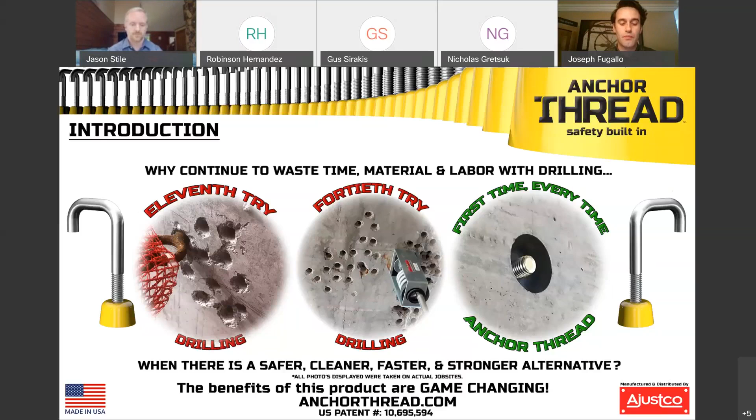Anchor thread is a revolutionary embedded anchoring system designed by construction professionals for construction professionals to practically eliminate the negative effects of post-pour anchor drilling while maximizing safety and efficiency. Anchor threads are installed before concrete placement for the purpose of being available for testing and utilization immediately upon stripping the formwork.

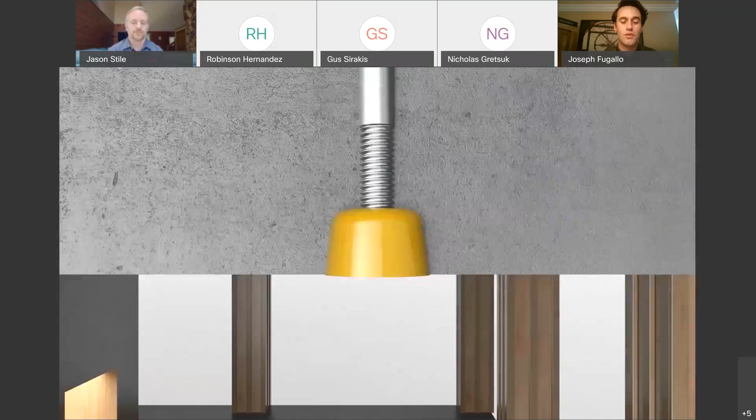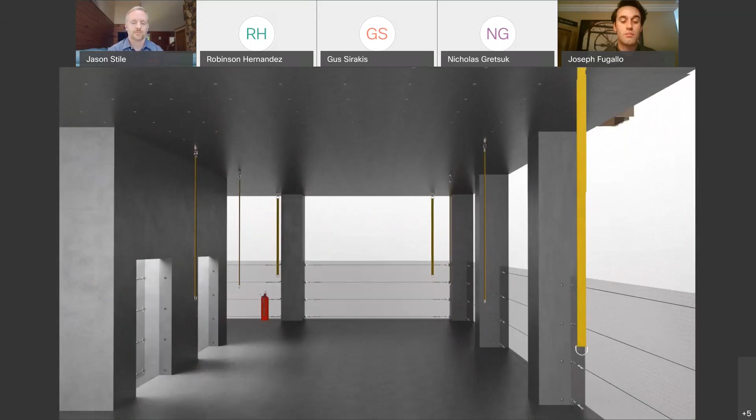First, the lock plates are nailed to the formwork where specified. Once the lock plates are nailed, the anchor bolt assembly is inserted and tightened down. After the concrete is poured and has achieved the required strength, the forms are stripped and the recyclable polycarbonate components are removed, leaving a clean, reusable, recessed anchor point rated for a 5,000-pound workload and 10,000-pound tensile strength, making it OSHA and ASTM compliant for applications such as fall protection, leading edge protection, safety netting, as well as mechanical systems such as sprinkler lines, plumbing, HVAC, cable management systems, ceiling systems, curtain wall, and many more.

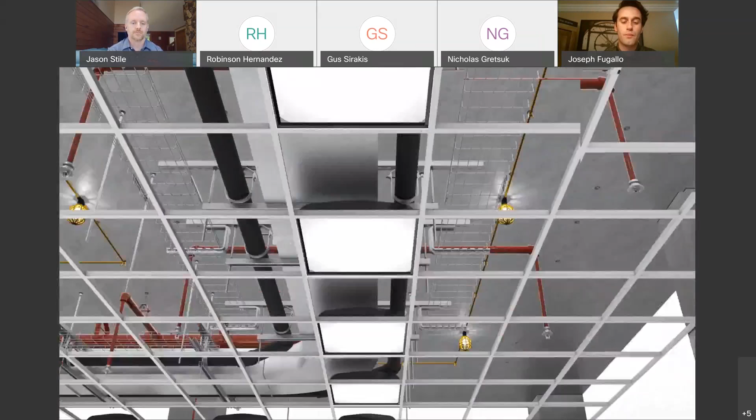We are currently developing variations of the anchor thread to work in precast plank and wet cast applications as well. With precast plank, anchor threads located on top can be used immediately for leading edge protection and reused later for a balcony railing system, for example.

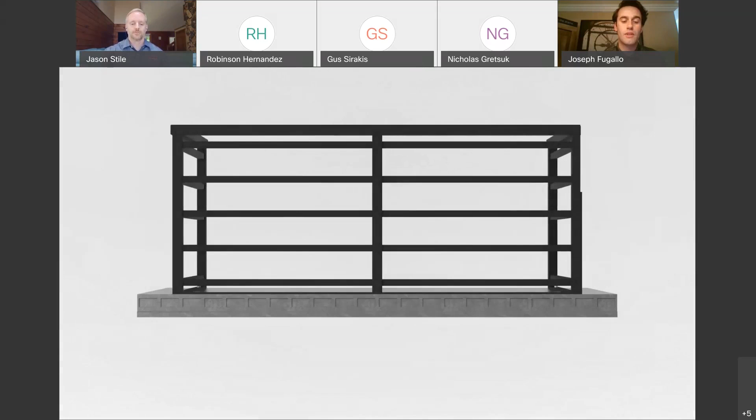The anchor thread can be quickly configured for either fall protection or mechanical systems, all while eliminating ground silica dust as well as the risk of drilling into hollow cores or pretension cables, which can be a very costly mistake to correct.

We offer a BIM object library to make specifying anchor thread as a connection detail quick and simple.

Now that I've explained how the product is installed and how it can be used, let me relate how anchor threads coincide with the aim of this innovation hack.

Implementing the anchor thread methodology practically eliminates the amount of concrete drilling operations conducted on site, which offers several tremendous efficiency and health advantages to building owners, developers, contractors, laborers, as well as environmental benefits to neighboring residents and businesses. First and foremost, anchor threads do not produce any of the hazardous ground silica dust generated by concrete drilling operations.

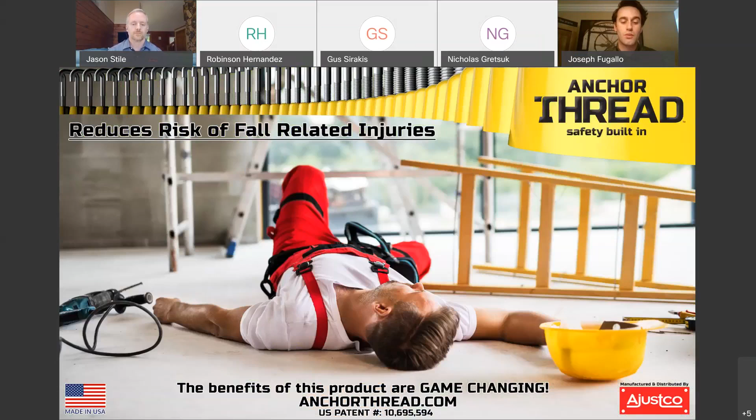Without drilling, there's also a considerable reduction in the amount of time laborers spend working overhead on ladders, which minimizes the risk of fall-related injuries. Local residents and businesses will appreciate the reduced noise level of the construction site.

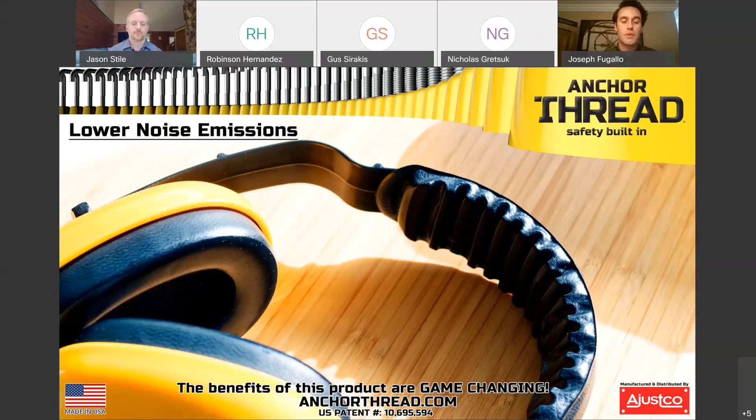With the time, labor, and materials saved with anchor threads over drilling, these resources can be better appropriated to ultimately produce projects in a safer, stronger, and more environmentally friendly manner.

In every way, the anchor thread embedded anchoring system minimizes the time and risk of installing concrete anchors while maximizing safety and efficiency. Moving into the products we have in development, we'll start off with the internal anchor thread.

The internal anchor thread is a two-stage female threaded cast-in-place anchor that features a 1/2" 13 thread as well as a 3/8 16 thread.

Next, we have the anchor post, which is a reusable temporary leading edge protection system that bolts onto the anchor thread.

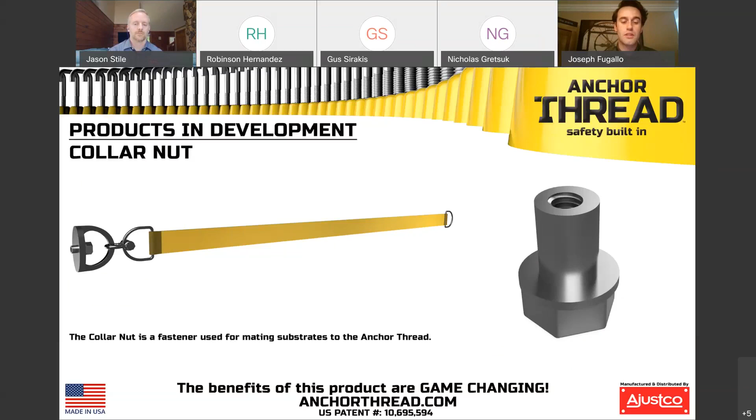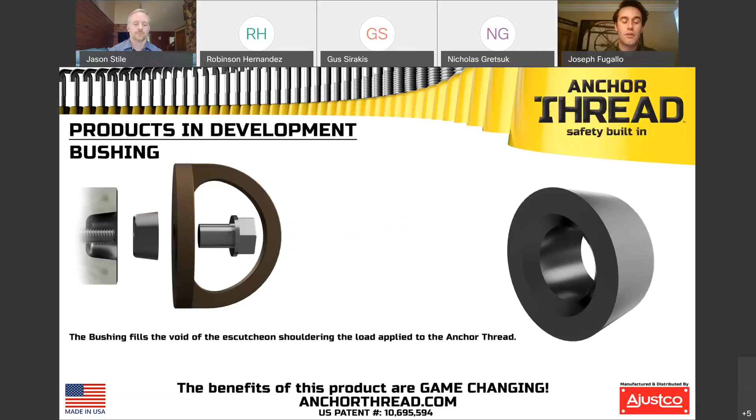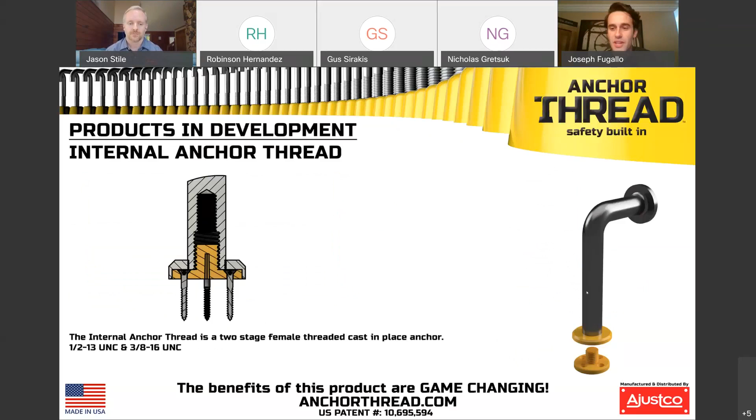So the anchor post is a temporary... I'm going to back up to that slide so you have a visual aid. The anchor post is a three-part assembly. There's a base component that fills the escutcheon cavity. The collar nut, as you saw earlier, goes into that base and threadably engages to the anchor thread that's in the concrete superstructure. Can you zoom in on that, Joey? I've been trying to figure out how to do that in the background, but I'm unable to, unfortunately. No worries. So once you have the collar nut tightened down, you then insert the post, and it clips in with these two clevis pins, and then you run your aviation cable through that.

Hey Joey, can you mention how, remember we met a gentleman that does a lot of tilt-up construction in the Midwest, and he asked us for a solution that he has a major problem with on a lot of his large job sites.

A gentleman approached us and asked if we could come up with a way to create a temporary leading edge system for his tilt-up wall company that would eliminate their current clamp-on leading edge system, which prevented them from installing the ceiling system simultaneously, or immediately following the wall being tilted up. This is what I came up with to solve that problem for him.

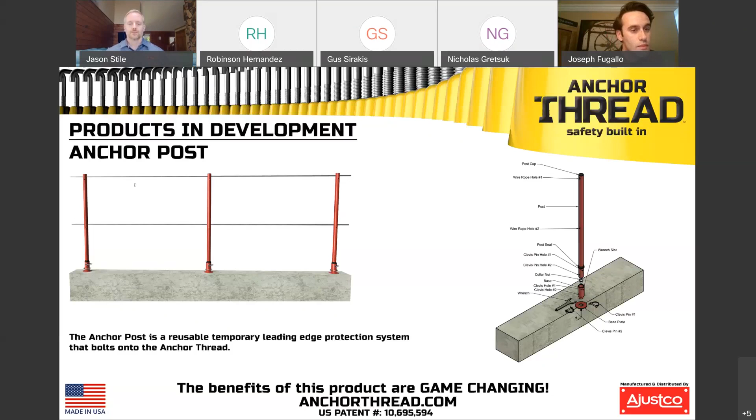We have a couple more questions coming in. What kind of testing have these systems gone through, and who is qualified to install them at this stage?

We're continuing testing because there are so many tests. The ICC-ES test takes a little while, maybe another 6 months to complete. But we've done extensive testing on site. We pulled the units in columns and in the ceiling. The max load we pulled was 13,800 pounds, and that was the limitation of the actual testing device. We couldn't test it to failure, and we didn't want to destroy the concrete on site. So we're continuing to do testing to failure, but the minimum load for fall protection is 5,000 pounds, as Joey mentioned, and the leading edge protection is 200. So this product far exceeds what's currently being used.

Right now, companies are drilling holes and then throwing in a wedge anchor that squeezes and wedges into the concrete. Often they'll use epoxy, which has to take 24 hours to dry, and technically they're supposed to be cleaning the dust out of the holes so the grip is tight. This eliminates all of those issues, because it becomes part of the superstructure.

We do have engineer drawings signed off by Becker Engineering, and we had some initial meetings with WSP. I want to give a shout out to both companies, they're fantastic engineering firms, and we'll continue to work with them. We actually have our test results posted on our website on the Anchor Thread page, and we'll continue to release those results moving forward.

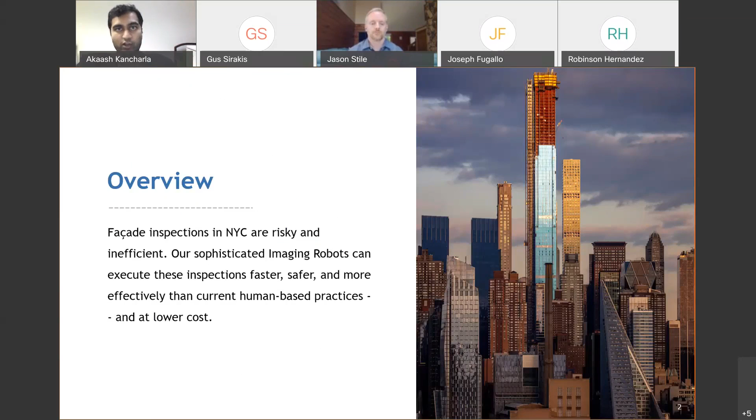Facade inspections in New York City are risky as well as inefficient. Our imaging robots are going to do these inspections faster, safer, and more effectively, at a lower cost. Presently, an engineer is on a suspended gondola, somewhat similar to what is shown here, usually accompanied by at least 2 riggers. The process is expensive, time consuming, requires multiple people, and puts them directly in harm's way.

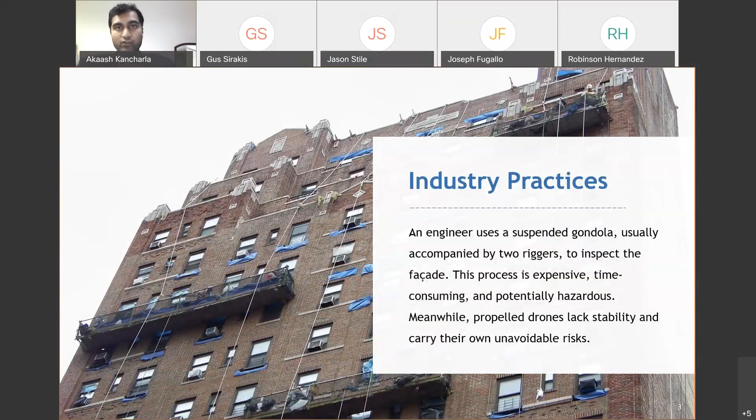On the other hand, drone-based solutions introduce their own risks, being a novel platform, and they don't offer as much stability as gondolas. Our solution combines novel robotics with time-tested mechanical elements, giving innovation at minimal risk.

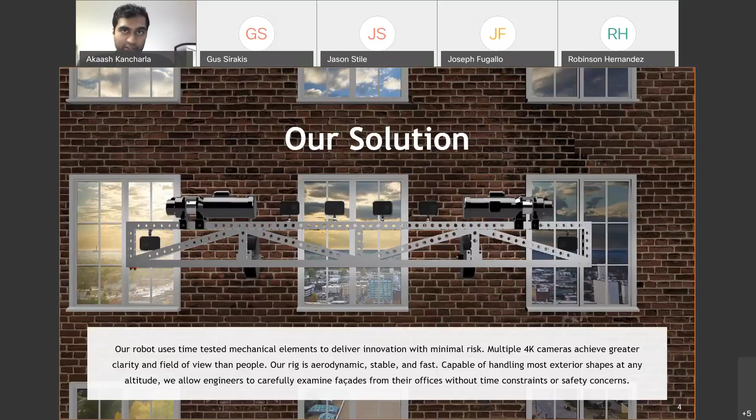We use multiple 4K cameras to achieve excellent clarity and much better field of view than a person could ever hope for. Our rig is aerodynamic, stable, and fast. We can handle most exterior shapes at any altitude. Engineers are going to be able to examine facades from the comfort of their office without any time pressure. Excellent for engineers who are afraid of heights. I know that there are at least some of them.

To go into a bit more detail regarding some selected components, the rig is basically split into 4 key parts. Cameras are very robust, they're 4K at least, and we have options for greater resolution if needed. We also have infrared options. Our hoists are extremely powerful. Each one can safely lower the rig on its own, offering a nice level of redundancy.

The pneumatic buffers and dampeners help absorb any unexpected impulse from either wind or any other external shocks. And the frame itself is extremely strong, offering well in excess of 15 times safety margin in accordance with building code regulations.

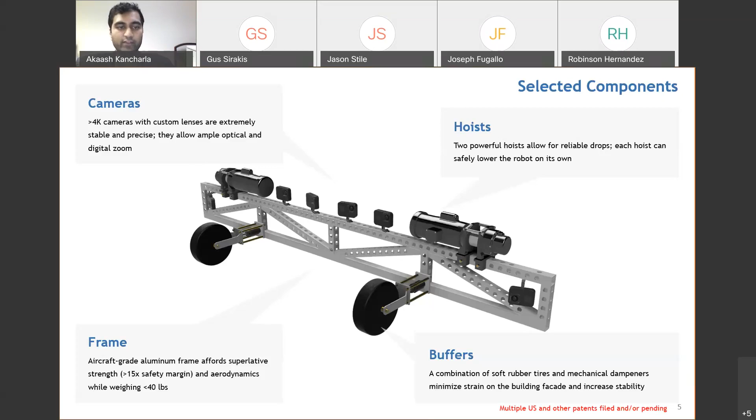Going into some of these in more detail, as mentioned, the cameras are at least 4K resolution. Depending on use cases, we can alter the field of view, we can alter the resolution, we can offer infrared and ultraviolet capabilities. Whatever the engineer feels is necessary for a given building, we can very easily pop those out, swap in another module. It takes about 5 minutes.

Talk about the hoist in a bit more detail. Adjust the line speed to suit whatever the engineer recommends. We target approximately 30 feet per minute, allowing us to do a typical 25-story building in full within about 40 minutes. Our integrated AC brakes inside each hoist are mechanical fail-safes that are extremely robust, very well time-tested, used in all sorts of military and heavy industrial applications, and more than capable of stopping our...

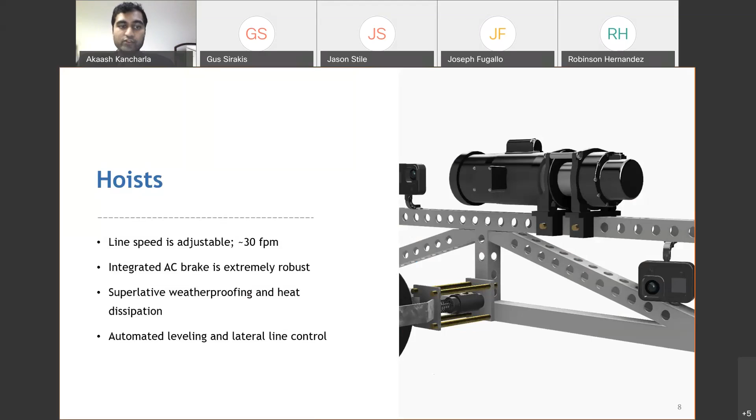240-pound robot indefinitely. Excellent weatherproofing throughout the system, as well as heat dissipation, lets these things run practically continuously, allowing us to handle very long drops, very large buildings without interruption. There is also automated leveling and lateral line control, stable throughout the entire descent.

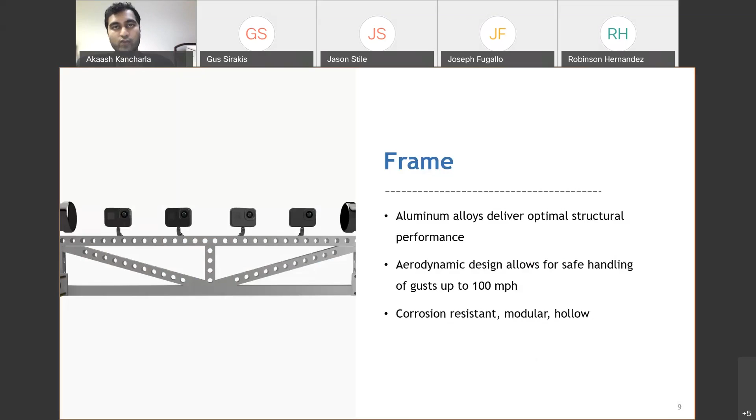The frame, as mentioned, is made up of several aluminum alloys, offering a nice strength to weight ratio, extremely aerodynamic, mostly empty space, as you can see, and we can handle gusts much beyond what we would operate in, and up to 100 miles per hour will be absorbed safely by our dampeners. Also corrosion resistant, very modular. As mentioned, we can swap components in and out very easily, and it's hollow, so a lot of the core electronics are nicely protected by that aluminum as well.

The buffers have a nice blend of soft rubber as well as variable density foam, and we've hollowed out the bracket on the right there, so you can see that pneumatic dampener on the inside. Basically, that serves to absorb any unexpected mechanical impulse, quickly convert that into thermal energy and dissipate it again if we get those unexpected gusts, if we have any unexpected impulse, it gets very nicely converted out. The rig resilience is obviously much better than any existing gondola, as well as propelled drones.

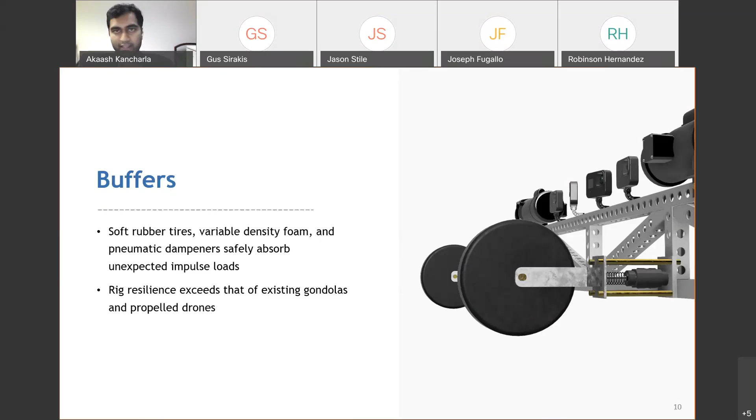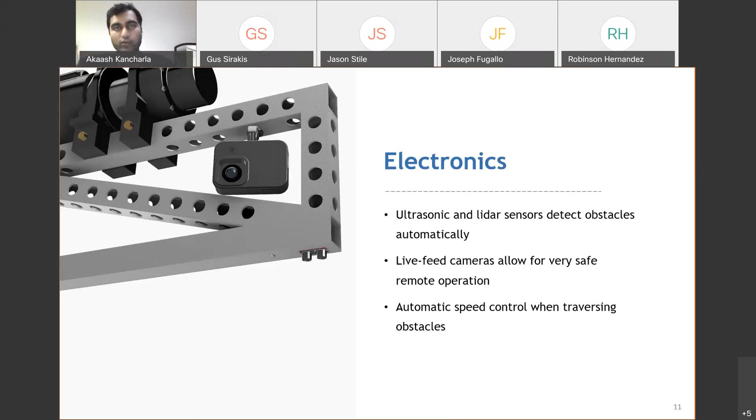On top of that, we offer several electronic safety checks, typically ultrasonic sensors, LiDAR. They help with the operator on the ground misestimating with their scope the extent to which things protrude. The rig can detect these, make sure that if an AC unit is sticking out too much, we're not going to run into it, as well as adjust the speed of the robot as we traverse anything unexpected. Live feed cameras are also going to give excellent field of view, both looking up as well as looking down. So the operator on the ground can definitely operate very safely.

Summarize some of these safety elements, again, just to be redundant and perfectly clear. The rig is very aerodynamic, it's very resilient to wind, and it's offering a lot more stability and safety than existing gondolas, as well as drones. Very lightweight at only 240 pounds per take, decently a bit less than that. The strain on the facade and the anchor points is minimized. Anchoring to the building is also a simpler process. We don't need very complex davits.

We don't need very deep penetration to get an appropriate safety margin for our anchors. We have automatic safety measures in place so human error is further mitigated. To be redundant, each hoist is capable of lowering on its own. There's also an independent safety line in place so that even if you lose both of these, which is unlikely, you still have time-tested mechanical devices used in military applications, as well as much heavier circumstances than what we're using here.

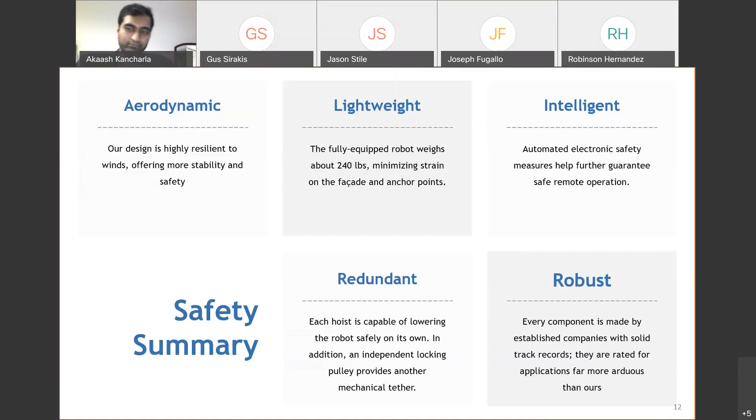To summarize our core advantages: we offer more thorough inspections because our visual capabilities are much better than people's. You have zoom, resolution, and stability all much better, and customizable per building per the engineer's recommendation. So we can view recordings over and over, and easily get multiple opinions. Engineers can reflect on recorded videos whenever they want from the comfort of their offices, getting second opinions from colleagues, etc.

The operation itself is a lot safer because no one is hanging off the side of a building. It's just the robot; the operator on the ground is also safely removed. We can cordon off the area so there's really no risk to anyone involved. Not only that, but because the impulse against the building is minimized, the load on the building is minimized, we also minimize any chance of damaging that facade through our operation.

On top of that, it's obviously cost effective and flexible as we can operate with fewer people and a lot faster. We maximize our utilization of the engineer's time by allowing them to remain in one position. They can review videos at any pace they want from anywhere. The operators can rig multiple robots very quickly.

I'm by no means a specialist, and it takes me about 20 minutes to set up alone. So one can imagine an experienced rigger should be able to beat me by quite a bit.

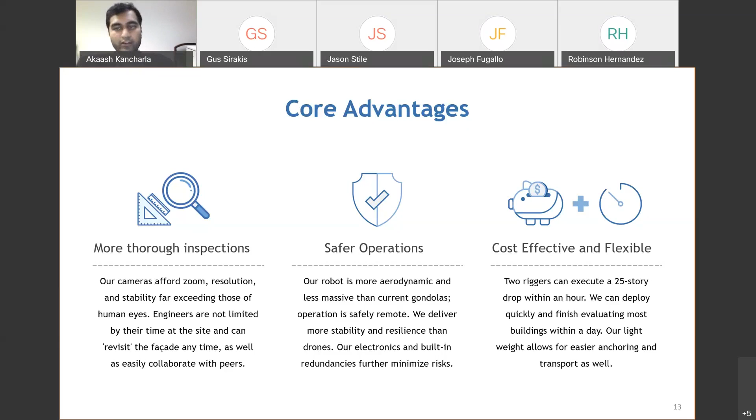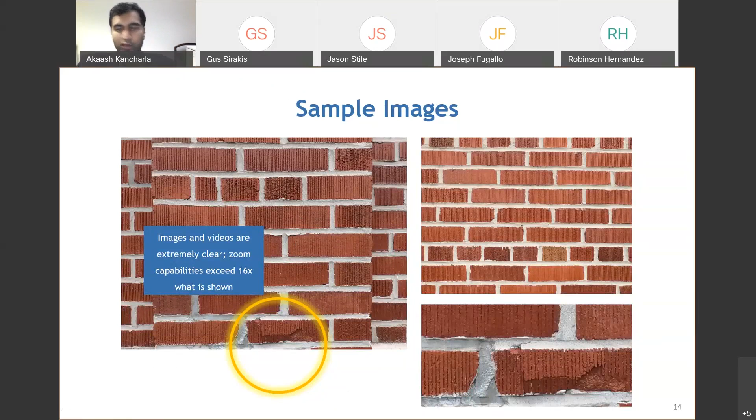Let me give a quick sample overview of what sort of images we'd expect. The clarity, as mentioned, is excellent. I'm not sure how WebEx is going to render these, but these are beyond Ultra HD 4K. You can zoom more than 16 times what I'm showing you here. The WebEx might not render those very well, but we can share the image of interest.

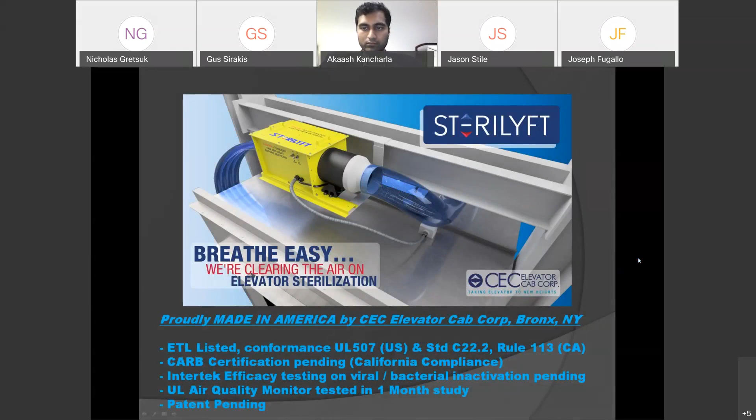Our product, Sterilyft, simply put, is an answer to the concerns raised about one of the most dangerous areas the public faces day to day in our cities with respect to COVID-19. Sterilyft has been designed and developed to be the safest and most effective airborne infection risk mitigation system for elevators, addressing the poor ventilation conditions that exist in this confined space.

With current code dictating very insufficient requirements compared to codes and regulations in other areas of the building, such as building mechanical requirements, elevators have now become a focal point as one of the worst, if not the worst, risk areas for contamination and infectious disease transmission. This is due in part to the airborne transmission capabilities of COVID, as current code requires very minimal ventilation and absolutely no mechanical circulation in an elevator, with the exception only of observation type elevators with glass walls exposed directly to sunlight.

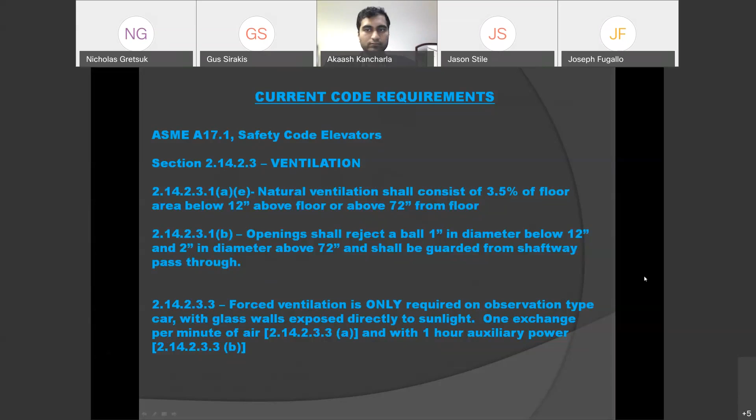In our extensive research and development, we designed Sterilyft to address several issues. One, the creation of an actual defined circulation of air in an elevator, which is suggested for all public areas by the CDC and stressed for confined spaces. Two, the utilization of CDC recommended MERV 13 filtration to remove pathogens, particulates, and other air contaminants both prior to and after germicidal treatment. Three, utilization of specialty ozone-free UVC irradiation in a time and distance controlled chamber for germicidal treatment.

Four, we took care to design the system to be as safe as possible to passengers by not adding any ozone, formaldehyde, or other toxic additives like some currently marketed systems do. Five, we sealed the system from the shaftway air so as not to add shaftway impurities, VOCs, mold, mildew, or smoke from a fire condition.

Six, the system actually removes contaminants and particulates from the cab interior air, unlike all other systems, which could actually add these from the shaftway and provide no means to remove in-cab contaminants.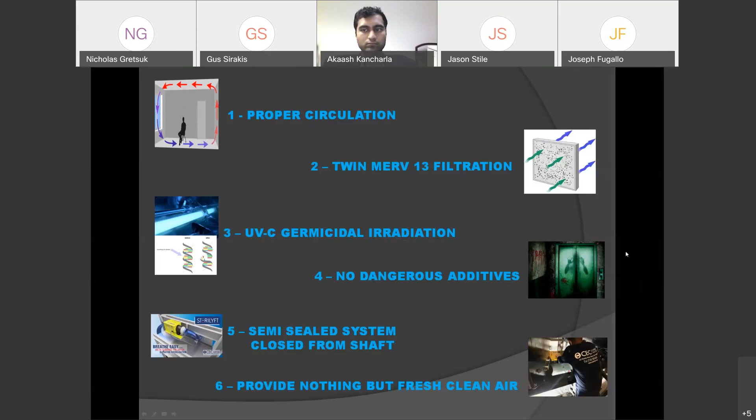Sterilyft has been carefully designed, developed, engineered, and manufactured to be the most efficient, effective, and safest system possible in the fight against COVID, as well as any possible threats that may come in the future.

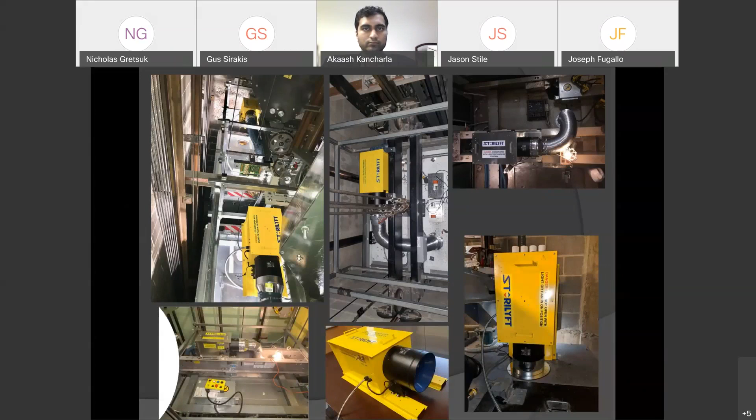Through installation now in 7 states and multiple cities, Sterilyft is working to help mitigate risks of infection from COVID and has even been tested by UL in a side-by-side comparison to a cab with only a standard typical exhaust fan. Air quality monitored data recorded by UL showed an astounding difference in critical particulate matter content, known as PM, between the 2 subject cabs.

Sterilyft showed a decrease in particulate matter, in a multiple data point range from PM 10 microns down to PM greater than 0.3 microns, of up to 97% less than that of the standard elevator exhaust fan. This test showed Sterilyft's superior performance in the removal of possible viral carrying particles within an elevator.

Given that a typical simple cough by an infected person can release on average approximately 450,000 airborne possible viral carrying particles, Sterilyft will remove 425,000 particles from the air, as compared to a standard fan shown to only remove approximately 120,000 particles.

Doing some quick speculative math, that translates to a standard fan decreasing your risk of being infected by that one cough by about 30% less chance as compared to no ventilation at all, where Sterilyft offers a 95% less chance. And of course, that last 5% is subject to an over 26 millijoule per square centimeter dose of UVC irradiation, which comes with 99.9% efficiency.

Our intention here, simply put, is to bring awareness of the inherent risks to health and safety resulting from insufficient code with respect to current risks, development, and new regulations, and requirements to provide the riding public with safe and healthy assurances of elevator use, and to help develop guidelines and new code regulations for the design, testing, and baseline elements needed to make elevators safe and healthy again.

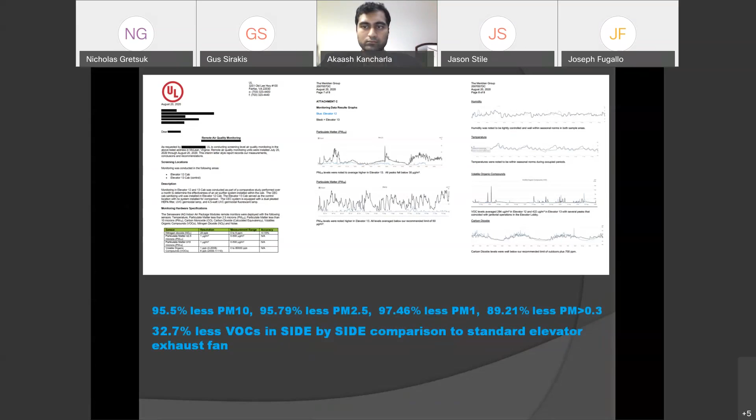The current pandemic, though very real, very serious, and very tragic, should serve as a reminder to us of the importance of proper guidelines of safety, public health, and code standards.

We strive, along with these other great innovations that were entered into this challenge and the many that will come in the future, to improve upon building design, construction practices, and the day-to-day operations and maintenance of building systems to ensure the most optimal safety and health conditions for all.

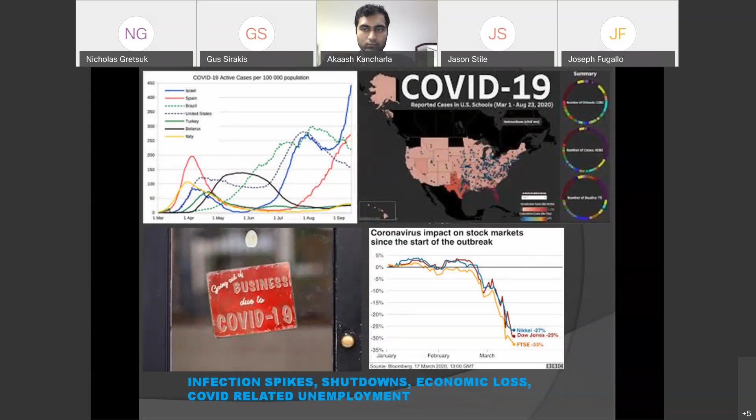Our goal is to provide all that we have learned and developed to collaborate with industry manufacturers and code enforcement to not only define and implement proper changes to current lacking code requirements to ensure optimal health and safety, but also to present research and documentation to not permit currently marketed solutions that could pose dangerous risks to the public.

What we do will be the results of the future. It will be our job today to lay forth the guidelines to overcome our issues for today and to prevent our failures of tomorrow.

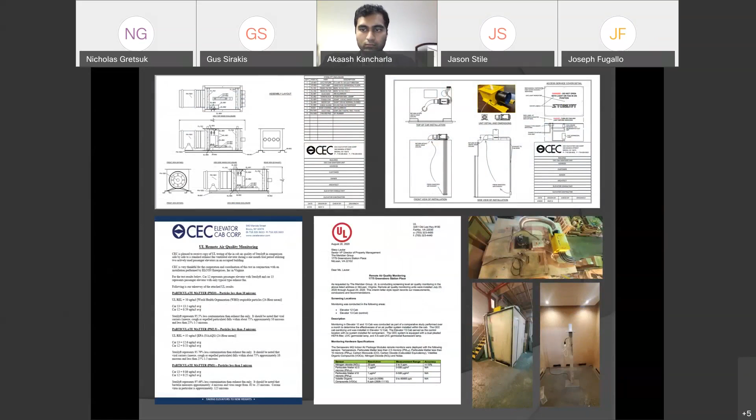Sterilyft has served to address 9 of the 11 points that were presented in this challenge: improvement of safety along with health, identifying code regulations that need to be incorporated as well as those that need to be eliminated or revised, and minimizing or eliminating particulate matter and contaminants.

Utilization of all properly labeled, tested, and fire-rated materials, adapting to all architectural elements as well as to existing or new installations, further development of Sterilyft to an integrated cab enclosure for collaboration with all OEM elevator fabricators, improvement of customer and all public's health experiences, as well as the continued process of improvement of economical success for business, public, and government by way of minimizing lost work potential.

Increasing confidence in elevator use, and helping to solidify occupancies in real estate of every single type. Seamlessly designing for optimal performance with minimal aesthetic effect.

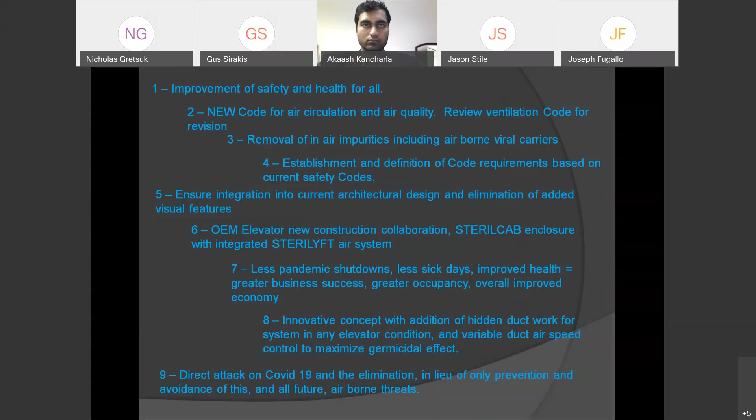And lastly, but certainly not least, the direct intention of the elimination of COVID and the continued preventative measures to stop the spread, eliminate the risk, and put us all back on a track to what will be our new normal.

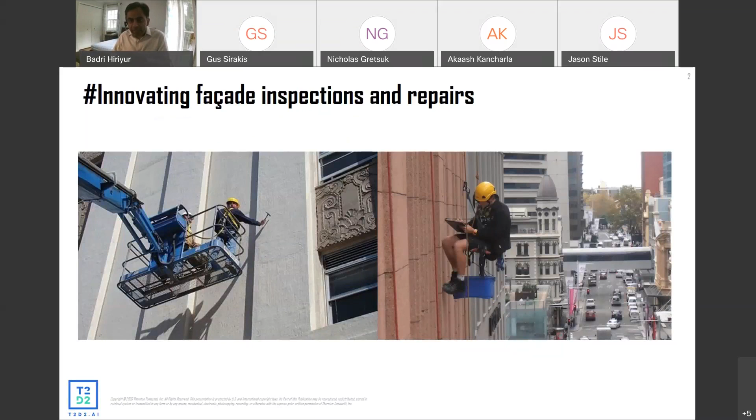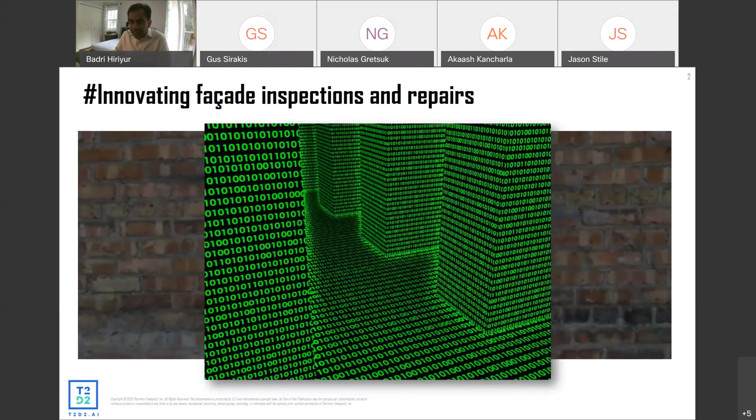As some of the other entries have already shown quite impressively, the answer is yes. Drones and technologies can be effectively deployed to virtually inspect large building envelopes and quickly and easily collect vast amounts of data about the state of facades and structures. But how do we convert all that data into information, and that information into insight about the state of the facade? This is where T2D2 comes in.

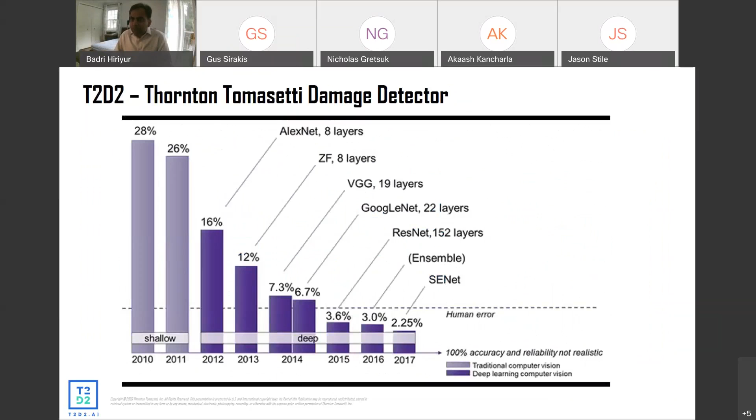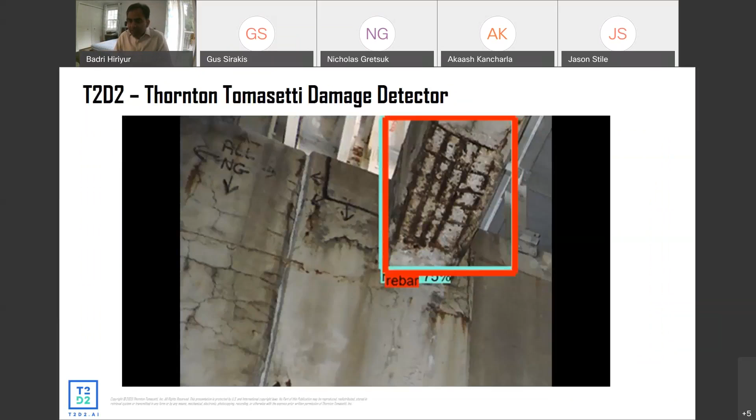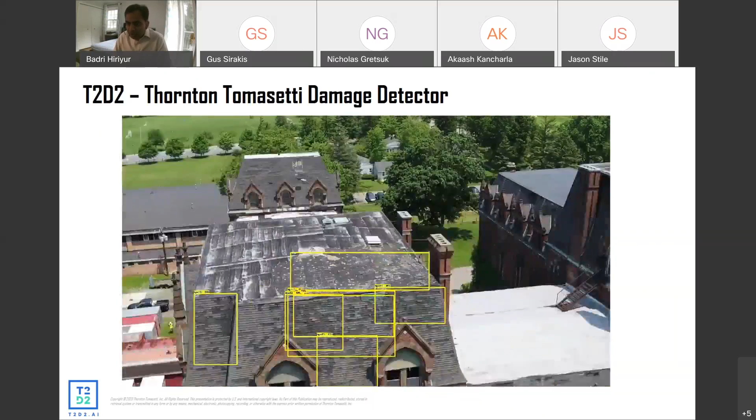We present T2D2, the Thornton Tomasetti Damage Detector. Over the last few years, computer vision technology has made tremendous strides, achieving better than human performance in several benchmark studies. This has led to wide adoption in various industries, including consumer technologies, security, and even medical diagnosis. Through T2D2, we bring the same technology to the AEC industry. We've deployed state-of-the-art computer vision models, a narrow form of AI powered by deep learning, to automatically detect damage and deterioration from image and video feeds.

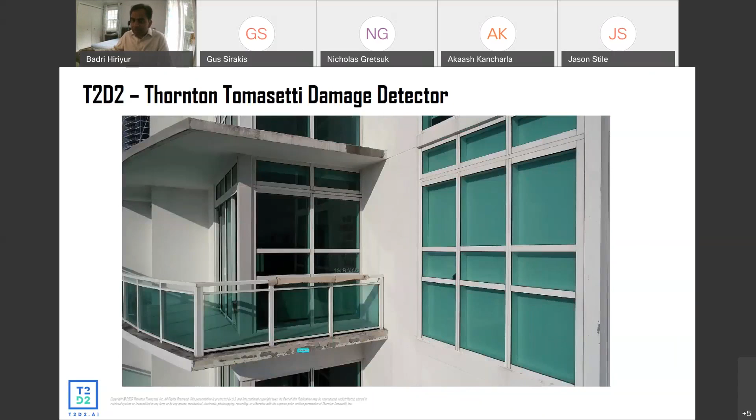TT has been inspecting buildings through its renewal and forensics practices for many decades and has a large collection of photographs showing various forms of damage and deterioration in structures. The T2D2 computer vision models have been trained on these datasets, carefully annotated by our experts. T2D2 has been deployed to process images taken by drones, as well as mobile devices and other traditional cameras.

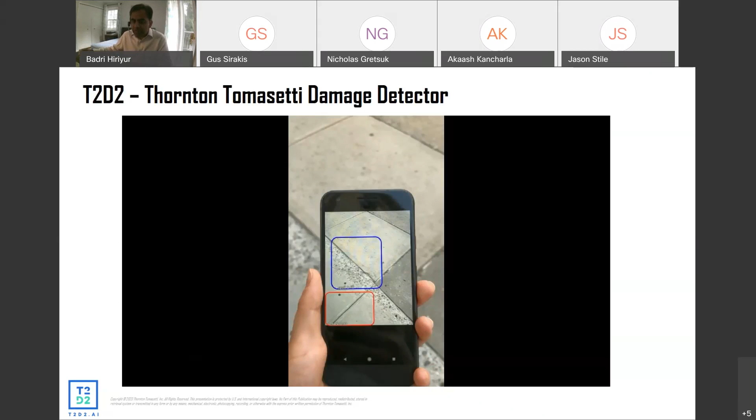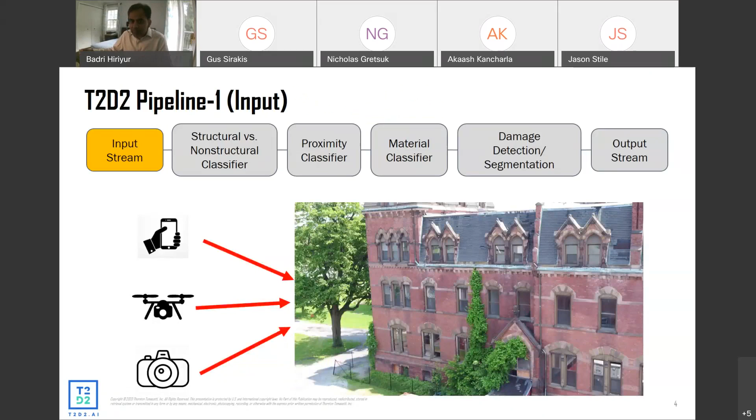So how does it work and what's under the hood? T2D2 is not just a single monolithic damage detection model, but instead it consists of a pipeline of various models built using machine learning. Some of these models are a binary segmentation classifier that extracts the structure portion of the image from its background, a proximity classifier, and a gridding tool that virtually zooms in on high-resolution images taken from a distance.

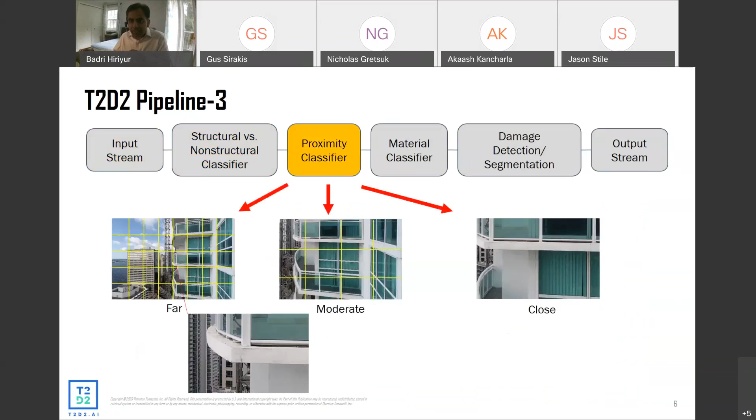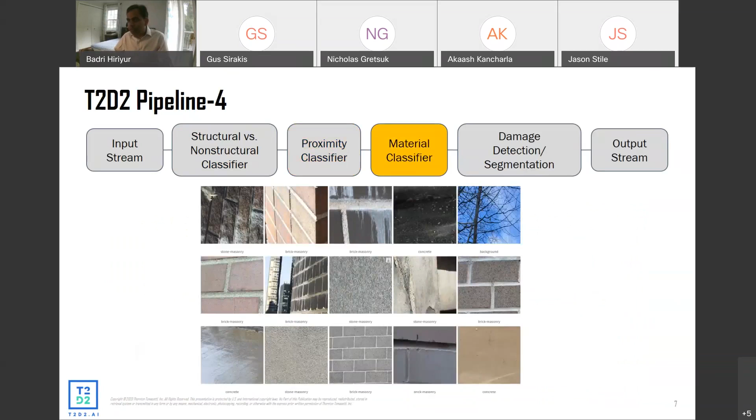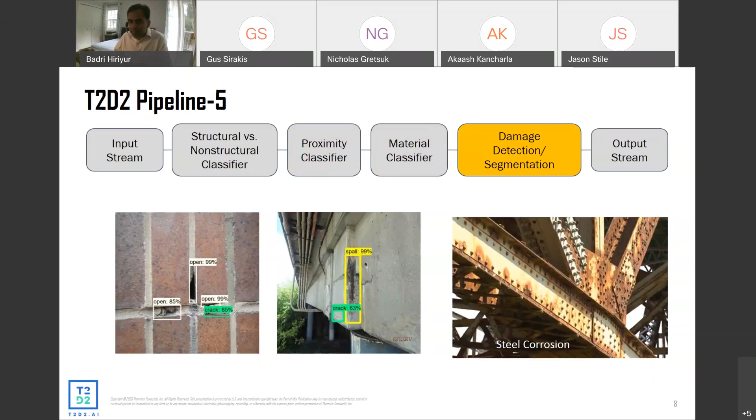The material classifier identifies the substrate material, such as brick masonry, concrete, steel, glass curtain wall, stucco, and so on. And we have different damage detection modules that are specifically trained for these different substrate materials. So depending on the material classification, the core damage detection modules will identify various types of damage conditions specific to those materials. For example, cracked mortar joints in brick masonry, spalling with exposed rebar in concrete, corrosion in steel structures, and so on.

The output stream is composed back from its original size from the gridded sub-images and then handed over to downstream functions such as generating reports and so on.

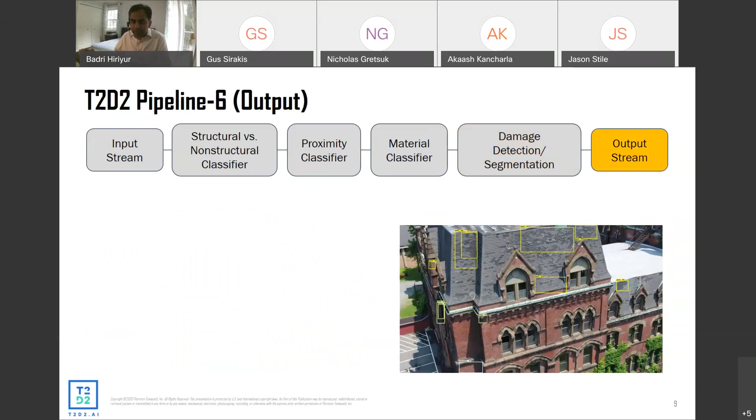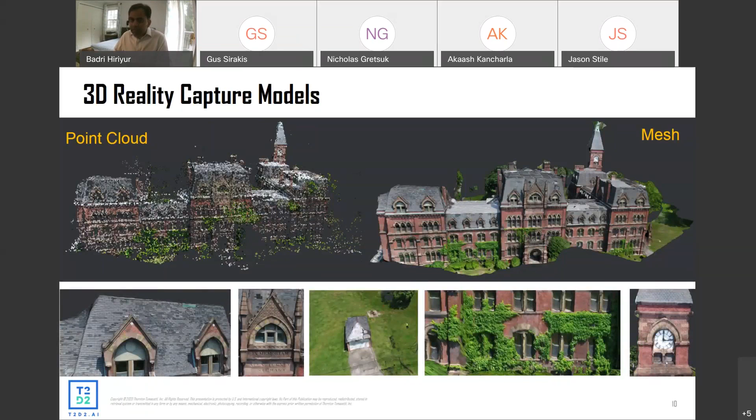Photogrammetry is routinely used on drone feeds to build 3D interactive photorealistic models. T2D2 can process these same image frames to identify damage conditions, and in the process, these 3D models can be geotagged with the T2D2 damage conditions.

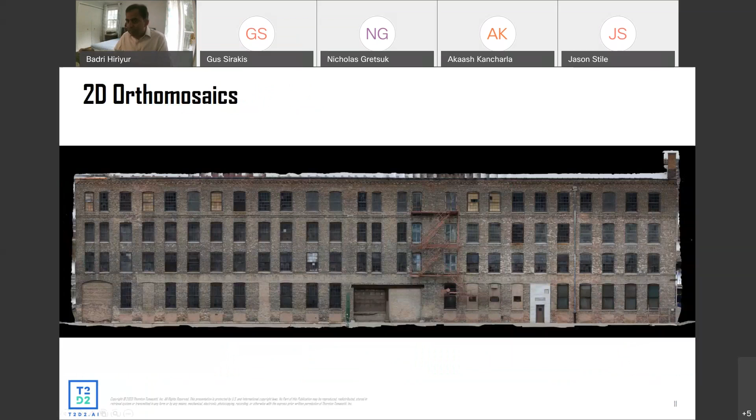We can also geotag 2D orthomosaics. These are photo stitches composed from hundreds of sub-images that are aligned and stitched together. And in this case, the damage detection is done using a sliding window approach.

While T2D2 is smart and can identify a lot of defects, it is, of course, not perfect, not at this time anyway. It too makes mistakes, sometimes flagging a stray tree branch or wires as cracks, or sometimes misflagging some conditions. So we have a team of engineers review the photographs and detections, and they mark up the false positives and false negatives. These corrections are then fed back into our training database so that the system can learn from these mistakes and get better over time.

And we have various metrics that we keep tracking over time to see how the models are performing.

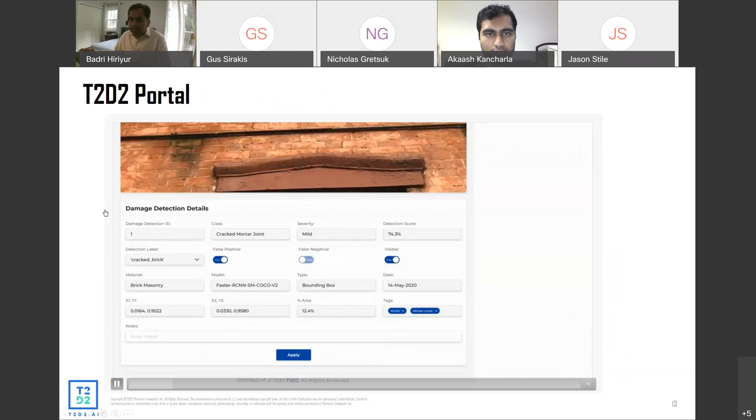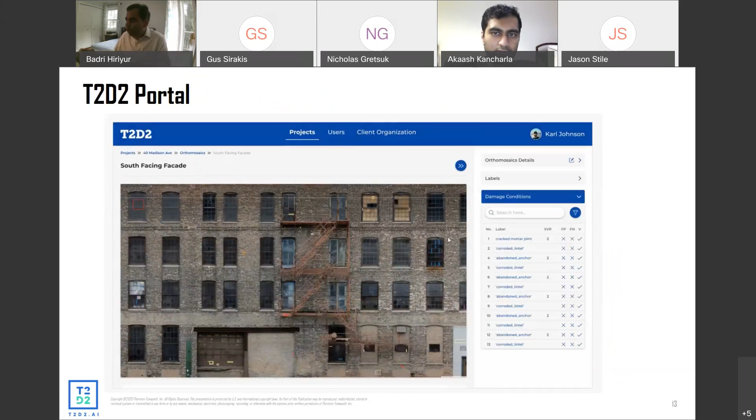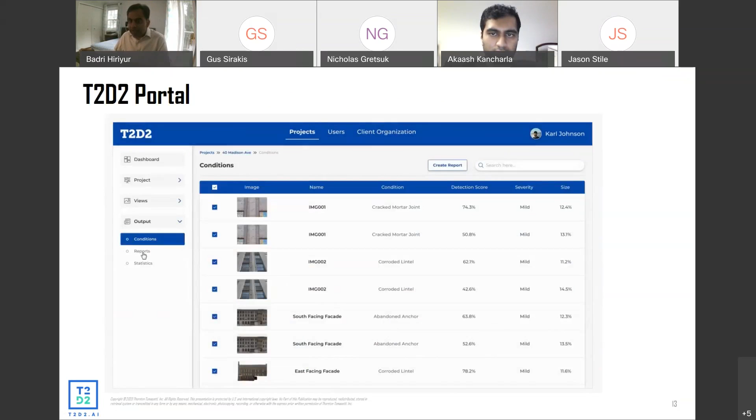The T2D2 online portal serves as a repository to host the digital twins of these building envelopes. As photo inspections are repeated for a structure, the portal can track how damage conditions at specific locations evolve over time. In some cases, they may also provide early warnings so that certain conditions are developing that may be easy to fix at an early stage instead of developing into costly or potentially unsafe and dangerous conditions if they're ignored.

So in summary, T2D2 brings the latest digital technologies to bear to transform the building facade inspection process while also promising to enhance public safety and increase efficiency.